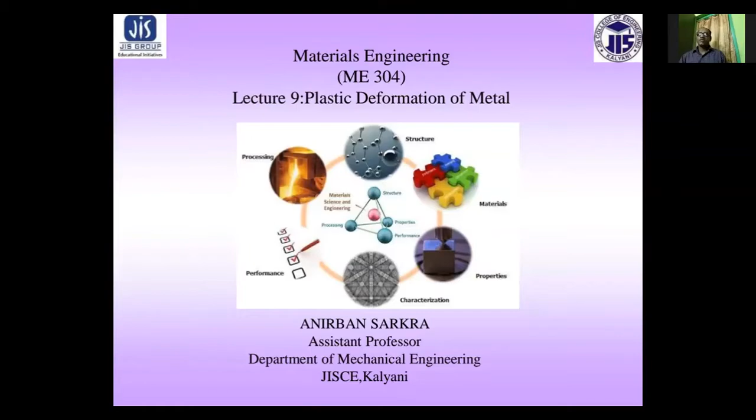We know that when a metal is stressed below its elastic limit, the resulting deformation or strain produced in the metal is temporary. This strain or deformation vanishes after the removal of stress and the metal goes back to its original dimensions.

When it is stressed above the elastic limit, plastic or permanent deformation takes place, and the metal does not return to the original shape after the removal of stress.

So, the ability of metal to undergo plastic deformation is one of the important properties which is utilized for shaping of metal by various fabrication processes such as rolling, forging, drawing, extrusion, etc.

Therefore, it is necessary to study the mechanisms by which plastic deformation occurs, so as to assess the behavior of metals under the various fabrication processes used in shaping of metal.

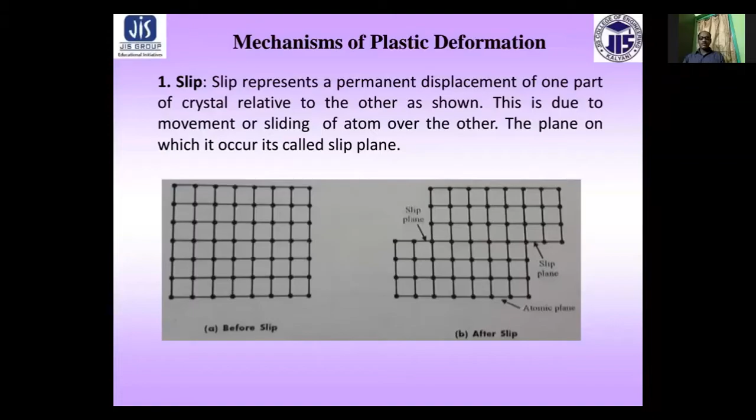Thus, in close-packed hexagonal crystals, slip usually occurs on the 0001 basal plane in the direction of type 1120. In FCC structure, slip occurs on the plane of type 111 and in the direction of type 110. In BCC structure, slip simultaneously occurs on many planes of type 110, 211, 321 in the direction of type 111.

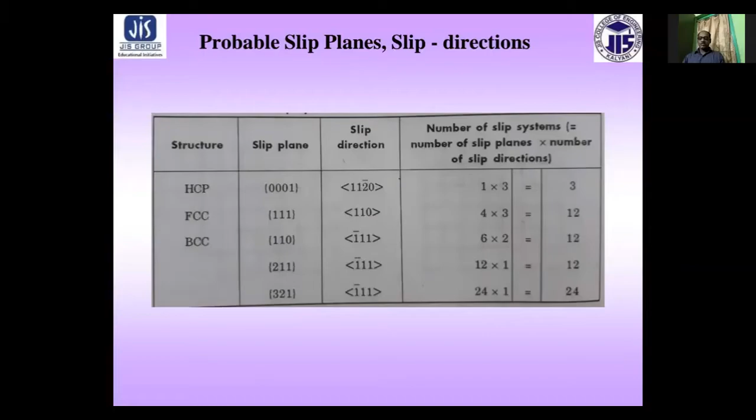Now, slip results from the motion of dislocation from one place to another place. There are two basic types of dislocation movement, called glide and climb.

In glide, the dislocation moves in a surface defined by the line and Burgers vectors. That is, glide is a conservative motion of dislocation.

In climb, the dislocation moves out of the glide surface, and therefore climb becomes a non-conservative motion of dislocation. Slip is the most common manifestation of glide.

The energy required to move a dislocation is proportional to GB squared, where G is the shear modulus of the metal or material through which the dislocation moves, and B is the Burgers vector.

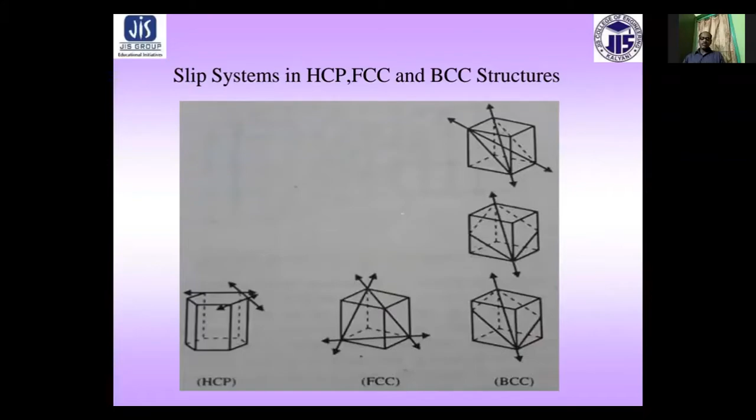Next is the mechanism of twinning. Twinning is a process in which the atoms in a part of crystal subjected to stress rearrange themselves so that the orientation of the part changes in such a way that the distorted part becomes a mirror image of the other part. As shown in this figure, a part of crystal is just a mirror image of the other part.

The plane across which two parts are mirror images is called the twinning plane or composition plane. Every plane of atoms shifts in the same direction by an amount proportional to the distance from the twinning plane.

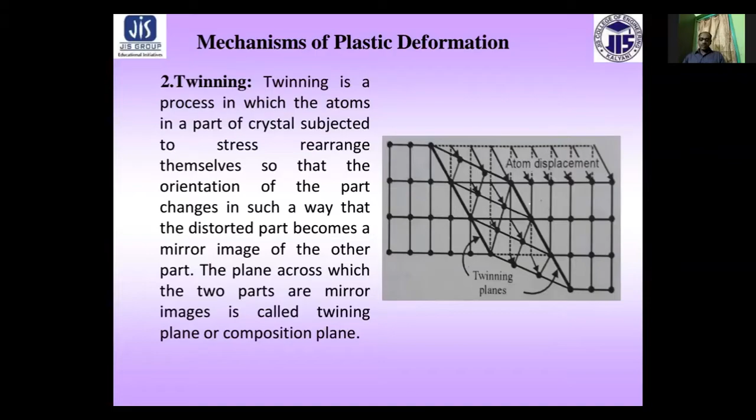Therefore, twinning can be defined as a homogeneous shear of the lattice parallel to the composition plane.

The direct contribution to plastic deformation by twinning is negligible. However, twinning creates favorable conditions for slip, and total deformation increases due to the indirect contribution by twinning.

Twinning occurs by plastic deformation or by thermal treatment. Twinning which occurs by plastic deformation is called deformation twinning and is most common in HCP crystals. This also occurs in BCC structure at low temperature. This type of twinning particularly occurs under fast or shock loading conditions.

The twinning which occurs by thermal treatment is called annealing twinning and occurs in some metals and alloys with FCC structure, such as copper, silver, and austenitic stainless steel.

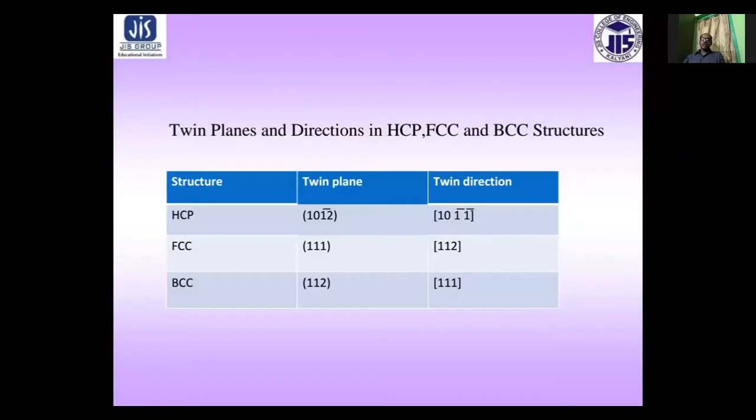The difference between twinning and slip: deformation twinning, also known as mechanical twinning, differs from slip in the following way. The twinned portion of a grain is the mirror image of the original lattice, whereas the slipped portion of a grain has the same orientation as the original grain.

Slip consists of a shear displacement of an entire block of the crystal, whereas twinning is a uniform shear strain. The direction of slip may be positive or negative, while the direction of shear in twinning is limited to that which produces the twin image.

The stress required to produce twinning is higher than the stress required to start slip. Lastly, the stress required to propagate twinning is appreciably less than required to initiate it, whereas the stress required to propagate slip is usually higher than the stress necessary to start the slip.

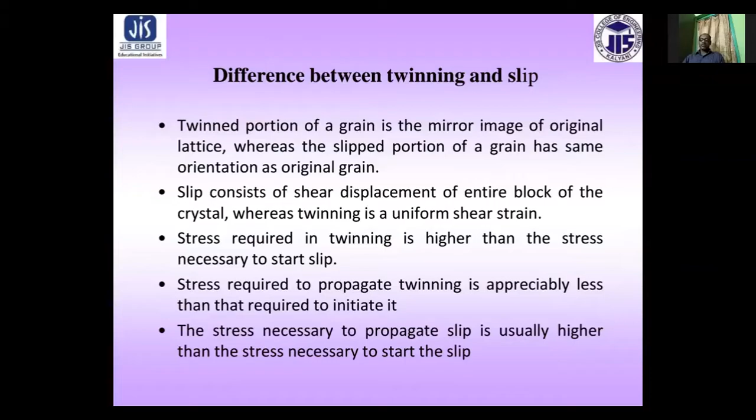Now next is work hardening or strain hardening. Work hardening, also known as strain hardening, means that metals become hard and strong during working or straining, and more stress is necessary for further deformation.

The stress necessary to cause slip is always increased after earlier cold work. This is due to the rotation of planes during working. If the critical shear stress for a given crystal is high, that is, if the crystal's elastic stress or elastic limit is high, before any slip, the crystal fails as soon as the applied stress exceeds the bond strength.

If the critical shear stress is less, plastic deformation starts before the cohesive strength is reached, and failure occurs as soon as the stress exceeds the cohesive strength of the material. From this, it is clear that a material having a low value of critical shear stress and a high value of cohesive strength shows more plastic deformation prior to fracture.

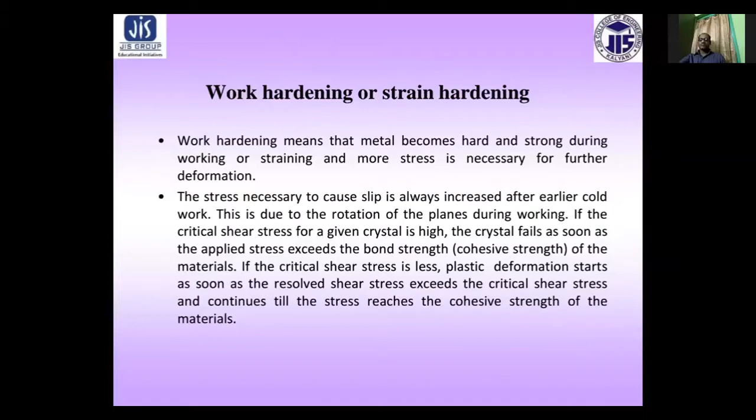Next is cold working and annealing. Cold working is a deformation process carried out under conditions where recovery processes are not effective, so it is generally done below the recrystallization temperature. Hot working is deformation under conditions of temperature and strain rate such that recovery processes take place simultaneously with deformation, and it is done generally above the recrystallization temperature.

Structural changes during the cold working of polycrystalline metals and alloys: first, changes in shape and grain size of the grain. The equiaxed grains on deformation are elongated in the direction of acting force, that is, stretched in the direction of the main tensile deformation stress.

Changes in orientation of grain, or preferred orientation/texture, occur in cold worked metal, in which certain crystallographic planes of the grain orient themselves in a preferred manner with respect to the direction of stress. Changes in internal structure of grain during cold working: around 15% of the work of deformation gets stored in the metal. The stored energy is in the form of energy of crystal defects.

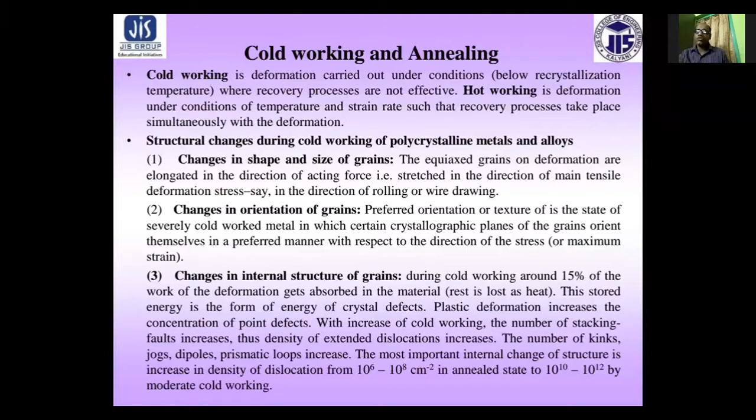Now, this is the comparison of mechanical properties during recovery, recrystallization, and grain growth during cold working and annealing of metal. So as we will see, the strength, ductility, hardness, and residual stresses are given here.

The ductility increases with recrystallization and grain growth. The strength and hardness decrease over recrystallization and grain growth.

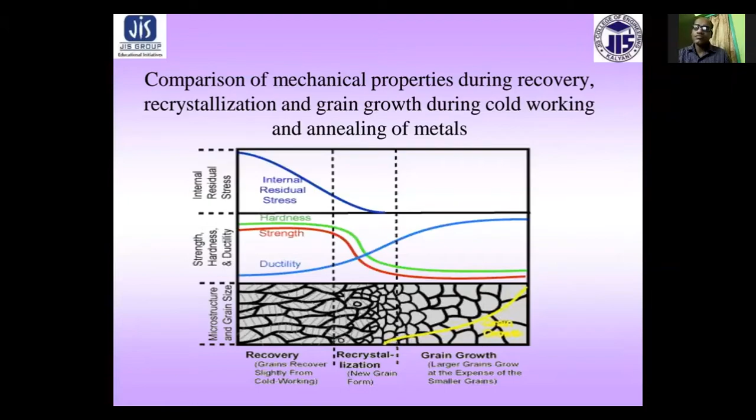Now, effect of cold working on properties. Cold working or strain hardening is the increase in stress required to cause further slip because of previous plastic deformation. It is an important industrial process used to harden metal or alloy that does not respond to heat treatment. It changes various mechanical, physical, and chemical properties of metal and alloy.

With increasing amount of cold work, ultimate tensile strength, yield strength, and hardness increase, but ductility decreases. Cold work texture and mechanical fibering leads to anisotropy in properties of material. The ductility and impact toughness are much lower in the transverse section rather than the longitudinal section.

As the internal energy of the cold worked state is high, the chemical reactivity of the material increases, that is, corrosion resistance decreases and may cause stress corrosion cracking in certain alloys. The rate of strain hardening is generally lower in HCP metals than cubic metals. High temperature of deformation also lowers the rate of strain hardening.

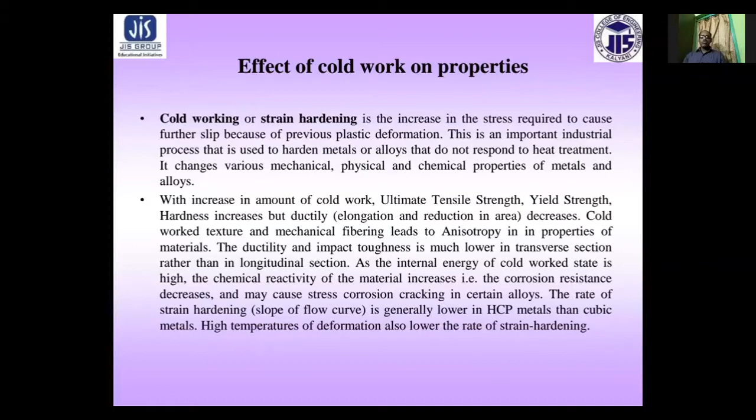Annealing of cold work material.

In certain applications, materials are used in cold work state to derive benefits of increased hardness and strength. The cold work dislocation cell structure is mechanically stable but not thermodynamically stable.

So, it is necessary to restore the ductility to allow further cold deformation or to restore the optimum physical properties such as electrical conductivity essential for application. The treatment to restore the ductility or electrical conductivity with a simultaneous decrease in hardness and strength is annealing.

It is heating cold worked material to a temperature above recrystallization temperature, holding there for some time, and then slow cooling. It is divided into three distinct stages: recovery, recrystallization, and grain growth.

There is no change in composition or crystal structure during annealing. The driving force for recovery and recrystallization is the stored cold work energy, whereas for grain growth it is the energy stored in grain boundaries.

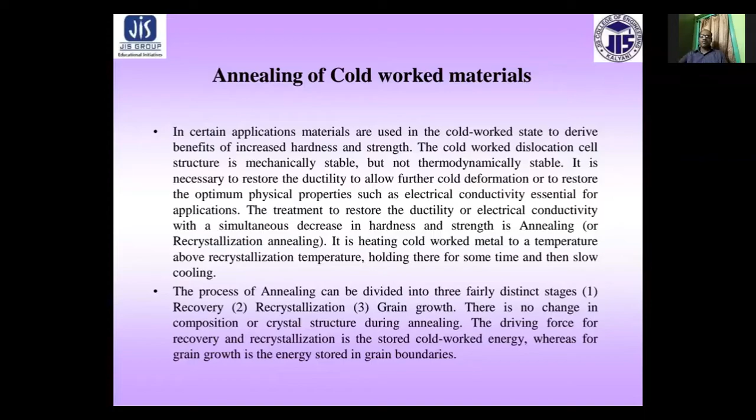Recovery is the restoration of physical properties of the cold worked metal without any observable changes in the microstructure. It is the annihilation and rearrangement of point imperfections and dislocations without the migration of high angle grain boundaries.

Recovery is initially very rapid and more when the anneal temperature is high. Electrical conductivity increases rapidly towards the anneal value, and lattice strain measured using XRD is appreciably reduced.

With increased time at constant temperature, the recovery becomes slower. The greater the initial cold work, the more rapid is the initial rate of

polygonization. It is one of the recovery processes which leads to rearrangement of dislocations with a result of lowering of lattice strain energy.

It is a process of arranging excess edge dislocations in the form of tilt boundary and excess screw dislocations in the form of twist boundary, with the result lowering the elastic strain. Climb and slip of dislocations are essential for polygonization.

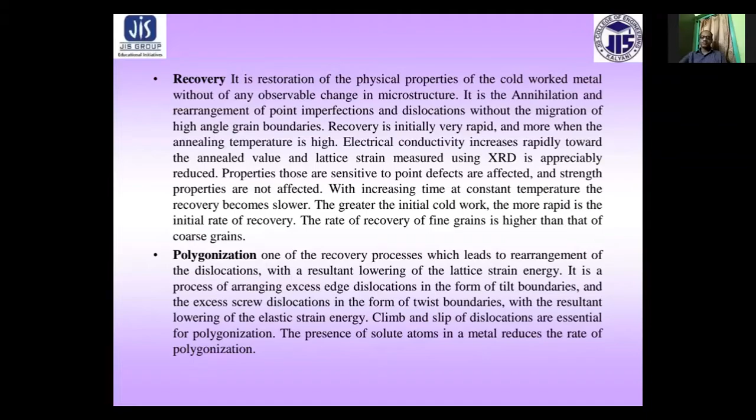Recrystallization is the nucleation and growth of new strain-free crystals from the cold worked metal. Kinetics of recrystallization resembles a phase transformation.

Two distinct nucleation mechanisms have been identified. That is strain-induced boundary migration, where a strain-free nucleus is formed when one of the existing grain boundaries bulges into its neighbor, leaving a strain-free recrystallized region.

New grains are formed in the region of sharp lattice curvature through subgrain growth. This seems to occur near inclusions or second phase particles.

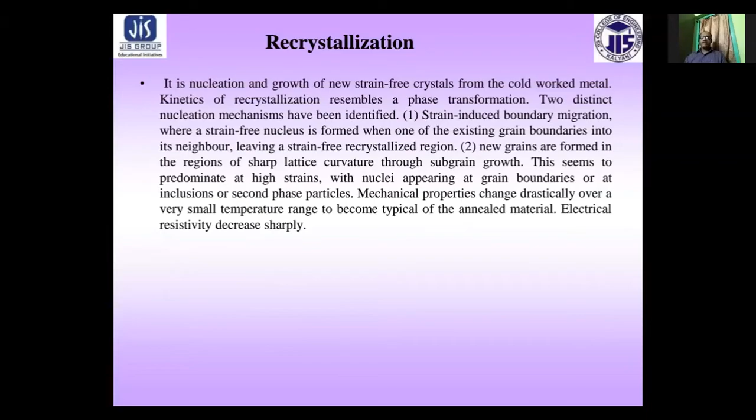Mechanical properties change drastically over a very small temperature range to become typical of the annealed material. And electrical resistivity decreases.

Factors influencing recrystallization are: amount of deformation, temperature, time, initial grain size, composition, amount of recovery, and method of deformation. Hence, recrystallization temperature is not a fixed temperature in the sense of a melting temperature.

It is defined as the temperature at which the given alloy in a highly cold worked state completely recrystallizes in 1 hour. The laws of recrystallization: a minimum amount of deformation is needed to cause recrystallization. The smaller the degree of deformation, the higher the temperature required to cause recrystallization.

Recrystallization rate increases exponentially with temperature. Doubling the annealing time is approximately equivalent to increasing the annealing temperature. Greater degree of deformation and lower annealing temperature result in smaller recrystallized grain size.

Larger the original grain size, the greater the amount of cold work required to produce equivalent recrystallization temperature.

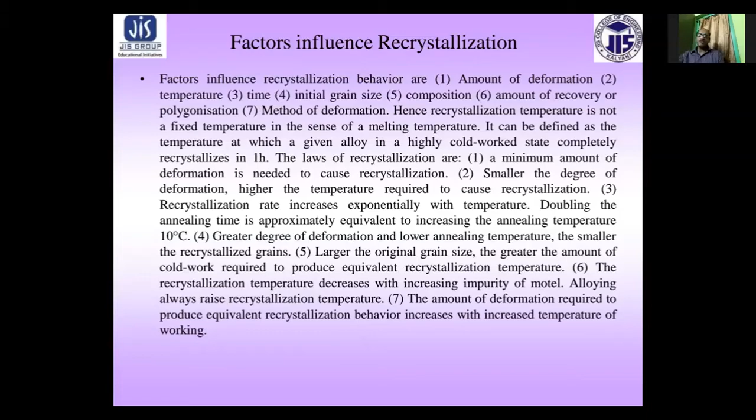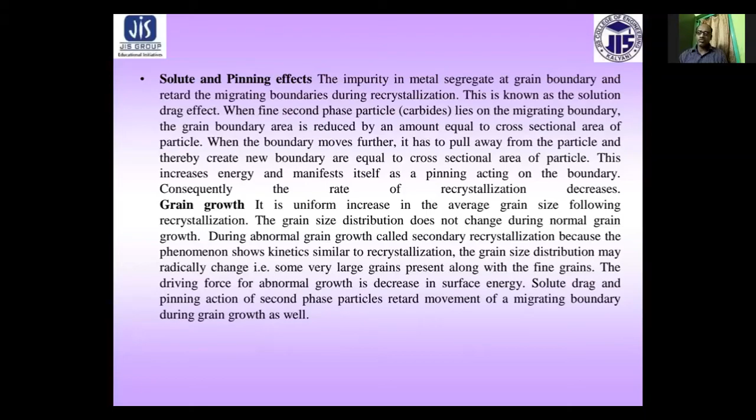So this is the effect of recovery, recrystallization, and grain growth.